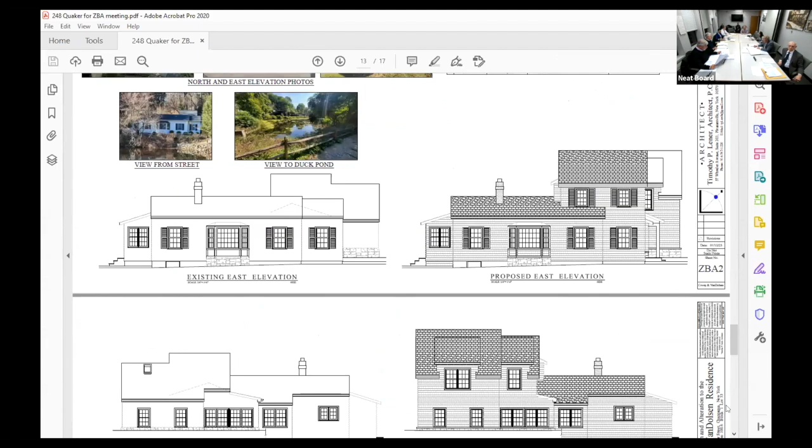Most of this house already sits within the front yard setback. It's obviously a kind of a flag lot off of Quaker. It's a long driveway on the right-hand side of the property.

So right there, you can see all the way on the left-hand side is the existing second floor, which mostly is sloped ceilings. There's a bathroom there, but it's extremely difficult to use. We're looking to gain space on that floor because there is no basement in this house.

The backyard consists of a septic system and the front yard consists of a pond and there's a driveway. So we're squeezed for space. We have a growing family here. So what we did is we raised up the portion of the second floor that's already there to full height. We also added over on the left-hand side of the house a bedroom.

So when you see the site plan, it's the pink area that we're asking the variance for. There's also a little roof for a front porch. There's currently no covering at the front door. So the area that's in yellow on there, if you can see it, that's the front porch we also need a variance for.

There'll be no expansion of the footprint of the house itself other than the front porch roof, which is a minimal impact on anything. So we're only asking to go up from where we are.

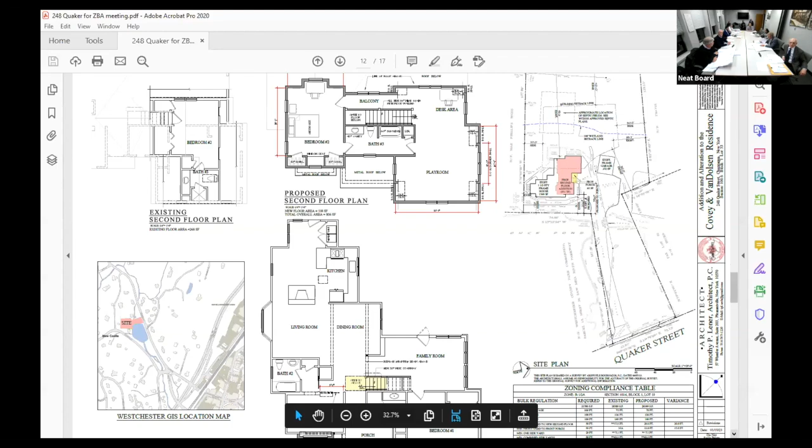We actually did keep, if you want to scroll down to the front elevation, Jackie. The ARB liked this elevation. This is basically the front of the house, even though it doesn't face Quaker over on the right-hand side.

We dropped knee walls down to keep the roof line as low as we could and still keep some nice architectural character. You see the little metal roof that we have that's consisting of front porch, and it's just a single open column that's going to hold that up. That's what we need, what we're asking for.

What space is there currently on the second floor? Well, you could call it a room. It's just an open room right now, and a bathroom, but the ceilings literally are sloping everywhere. I think that addition was put on in the 80s.

I think we had the old plans. It was from the 80s, and I don't know why on earth they built something brand new so low, but they did. There's almost no windows in it. It's not a great space to try and live in.

To reiterate, you're not changing the footprint? Not changing the footprint. And that porch exists there now? Well, there's like a stoop there for it now, but the roof does not exist, and that's the part we're adding. That's the part that actually kicked us to go to ARB for the minimal amount that it is, but they didn't have any issues with it.

Okay. And it'll protect the front door. That's the main way into the house from the driveway. So it'll be, rain and snow, they'll be covered.

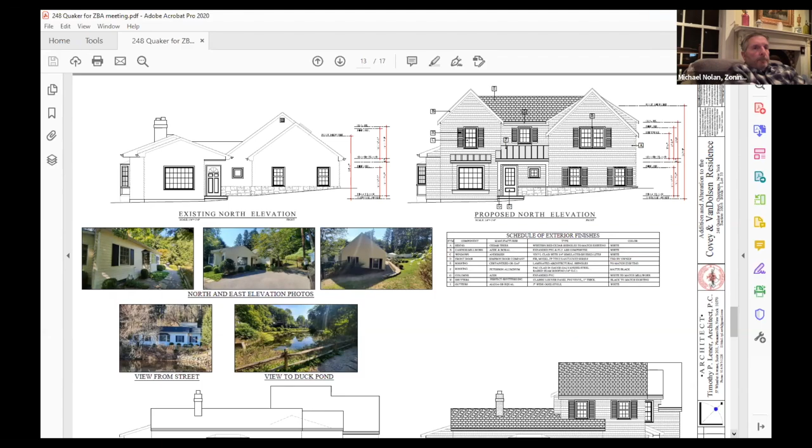I'll make a motion. I move that the Covey VanDolsen application for a front yard variance of 17 feet and a front yard variance of 30 feet, the first for a porch, the second for a portico for the second floor addition, be approved for the following reasons.

There will be no expansion of the footprint of the house. There are severe limitations on doing any work at the house because of pond, septic, and a driveway. This is a pre-existing non-conforming site. The applicant has already gotten ARB approval.

Certainly the expansion will allow for greater use of the building. There will be no undesirable change in character of the neighborhood.

Benefit cannot be sought through other means. The requested variances are, in some cases, substantial, but understandably, given what I've said previously, there'll be no adverse impact on the physical environment. The alleged difficulty was not self-created.

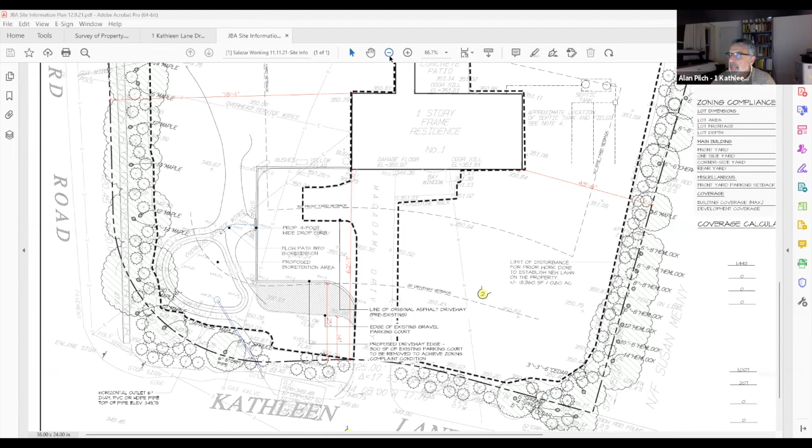Okay, very good. So this property, located at 1 Kathleen Lane, at the intersection of Bedford Road and Kathleen Lane. Historically, there was an existing paved driveway which accessed the house, in the center portion of the lot. There was a gravel parking area located here, which was too close to the front lot line, so that's a violation.

So what we had done was develop a plan to relocate the edge of the pavement to 25 feet as required in the zone, because the front yard setback is 50 feet, so the parking area is required to be 25 feet from the front lot line. That's what was shown on the plan.

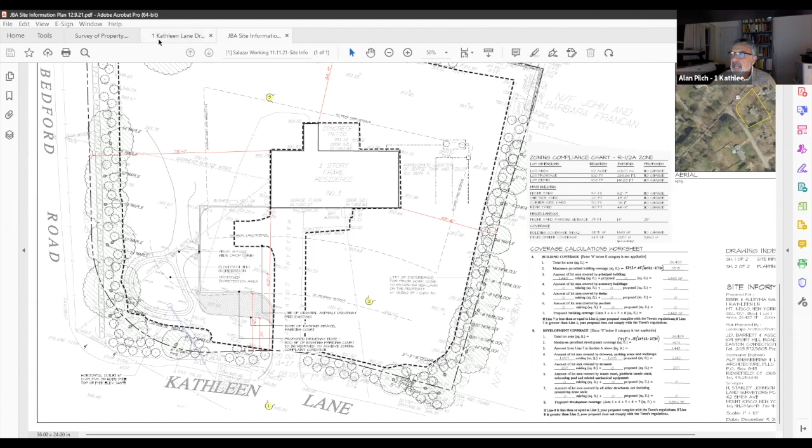And I'll say, unfortunately, that's not what happened. In order to construct this parking area and modify this area in the front lot, the corner of the pavement ended up 22.9 feet away from the front lot line. That is why we are requesting that the board grant a variance of 2.1 feet for the parking area.

Alan, we're not seeing that. You're not at all? We were seeing the survey. Now we can, now we can. Okay, I tried to show a picture. Did this not show up? No, no photos. He might be on a bit of a delay. Well, I'll just say, at any rate, I don't know quite why it isn't.

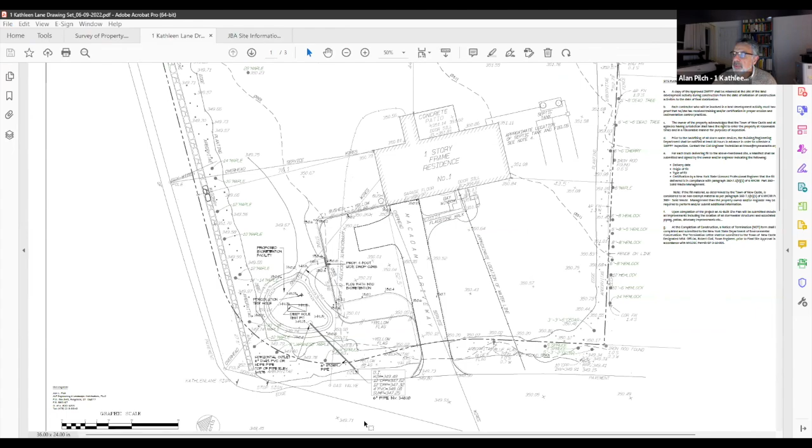That being said, there is a line. Let me just go away from this plan. There is a line of vegetation along the perimeter here, which effectively with a stone wall along Bedford Road, and a line of vegetation along the street, effectively screens the constructed parking area from the street. And at the last meeting, we were requested to submit cost estimates for the work to be performed.

This would be the work to be performed, which would involve cutting the pavement, removing a portion of the stone curb, resetting the curbing, doing any patching that's necessary, and adjusting the sprinkler heads, which are here.

And the estimates, which we submitted this week, were $5,950 to do the adjustments to the curbing and the pavement, and $1,175 for adjusting the sprinkler heads in this area of the property, for a total of $7,125.

So I just want to make that clear, that's one of the reasons we're kindly asking that you grant the variance of 2.1 feet for the parking area due to its proximity to the front lot line. I say it's really quite invisible from the street and also from Bedford Road. My own feeling is it really doesn't harm the community, but I'll let you discuss it here.

Could you repeat for us the circumstances, as you understand it, which resulted in this miscalculation?

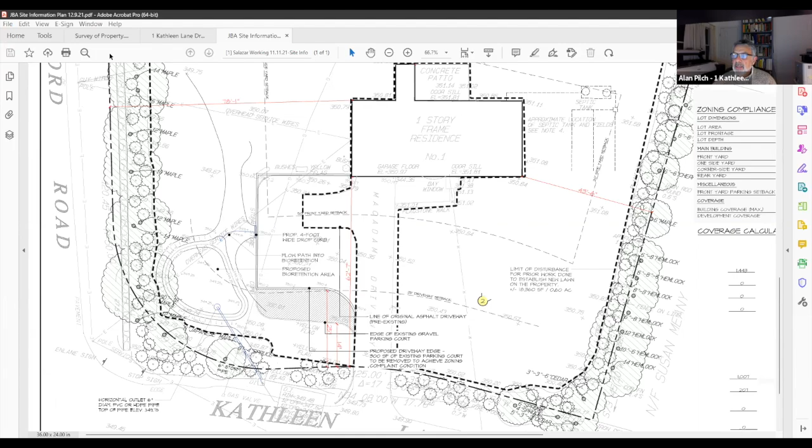So Mr. Salazar engaged a contractor to do this work. Unfortunately, when we had the as-built survey, we found that this parking area was not 25 feet from the front lot line. Instead, it was constructed at 22.9 feet from the front lot line, instead of 25 feet. And so we are requesting the board, if they would kindly grant this variance to permit it to remain here at 22.9 feet from the front lot line, knowing that it was supposed to have been constructed at 25 feet.

Was the contractor given instructions to use an existing survey to calculate the proper location? Or how was he instructed as to where the setback line should be observed? Well, I know that the contractor had the plans in order to do it. I'm really not sure exactly how the contractor calculated the setback from the front lot line in order to make this error and end up being 2.1 feet too close to the front lot line.

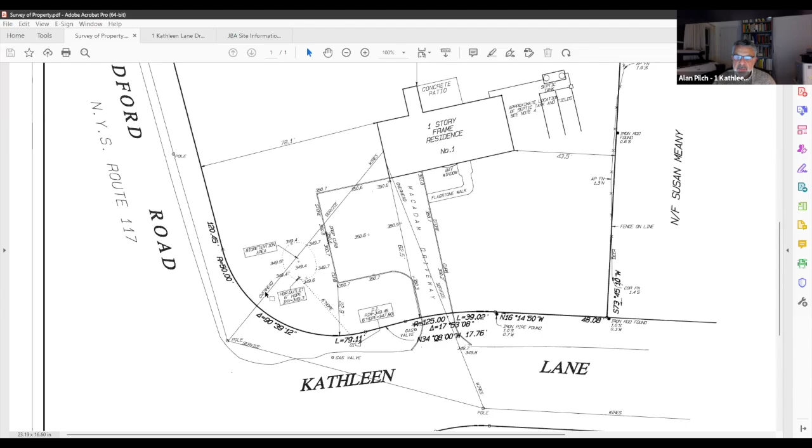When you look at it, it's very subtle, obviously - 2.1 feet towards the street, when there's vegetation along the entire perimeter. I don't understand exactly how that happened either, but unfortunately, that's how the contractor constructed it. I think he maybe measured wrong for some reason.

What vehicles will be parked in the parking area? The reason I have the long curb is because I have a GMC 2500. To make the turn, sometimes I have to go back and forth. I also have a Tahoe for my family, and an Acura - 3 cars. But the most difficult to maneuver is my GMC, a 2500 Denali - that's a big truck. So sometimes I have to go back and forth because I like to come up straight from the street. If I come up backwards and go too fast, I don't want to have a problem. But that's another thing that will help me.

The house has a one-car garage, and so typically when I've been there, there've just been regular passenger vehicles - one or two parked there.

Carrie, is there anyone to be heard on this matter? There are no hands raised. Okay, thank you.

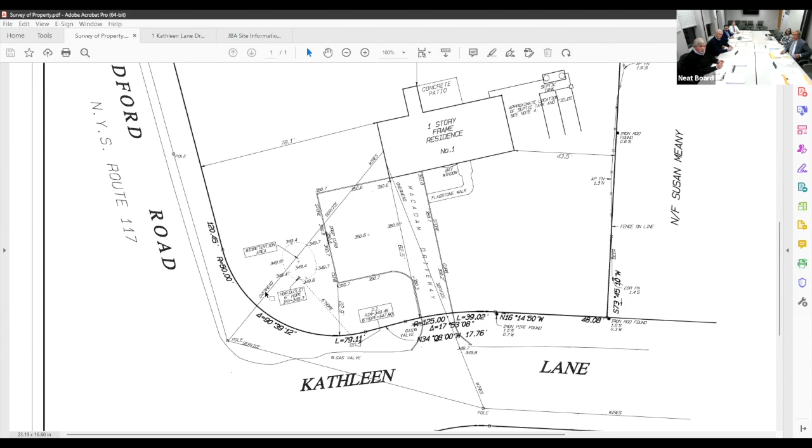Any other questions by the board? Michael, you're okay? All good. I can unshare if you like.

You're inclined to vote, yeah, okay. I make a motion to close the public hearing. I'll second. Chairman Ken Cooper, aye. Howard Dubs, aye. Mike Nolan, aye. Ron Genzeg, aye.

I'll make a motion to approve the request. The request is for a variance of 2.1 feet. Tom, you're confident that that's the right number? We have a survey, yes. Okay, sir, yeah.

The applicant has pointed out that there is a wall on Bedford Road, and there is adequate vegetation on Kathleen, both of which serve to screen the parking area. The applicant has tried to bring the parking area into compliance. He has failed in the sense that he does require this variance. He has come forward and demonstrated that to correct the miscalculation would cost on the order of $7,100. We have no neighbors speaking in opposition to the application.

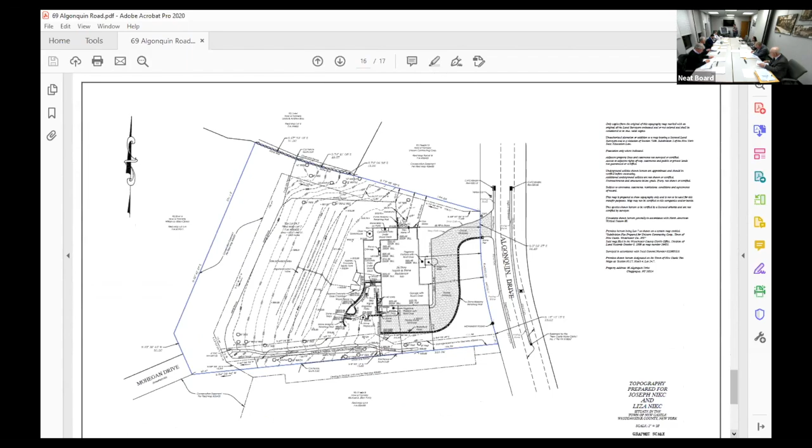As we started to unfold the layers of complexity of trying to get a pool approved, we recognized that as the house sits now, we are over on coverage by about 325 square feet of development coverage. We are adding a modest pool associated with an existing terrace in the rear yard of about 815 square feet, which puts us over 1,100 square feet on the development coverage.

On the overall site plan here, aerial map, there's an existing terrace, and the pool will be associated on this part of the property adjacent to it. This shows what happened on the property prior to my client owning it. As you can see, this circuitous S driveway was much narrower here, and there wasn't really anywhere to park. The distance between the retaining wall and the garage is only 29 feet.

So if you had guests coming in, you'd constantly have to do like a 5-point turn to get out of here. Understanding that, more than likely they've widened this driveway. I've been there numerous times. What I usually do is park and back out and leave instead of trying to turn around.

So I think that was part of the development coverage that expanded, and I know that for a fact because I looked at some of the old plans. This was under the previous owner, trying to give you a little bit of the history and why.

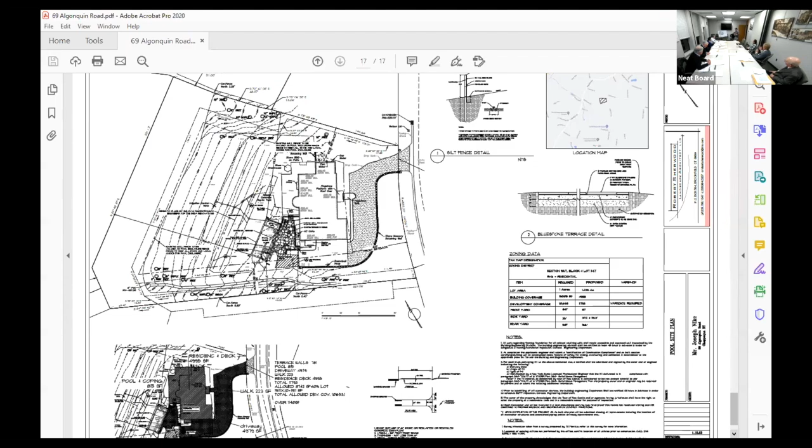In looking at adding this 800 square feet for the pool, did you look at the rest of the property in totality to see if there was something else that could be done to either mitigate that 800 or detract or delete from the overage? We have, and I discussed it with the homeowner.

What's the best plan to kind of mark up? As we come around this, the garage doors end here, and they built a pad over here in paver, so you can clearly tell it wasn't original. This space is all Unilock pavers, while the rest of the driveway is a nice, beautiful pea gravel. So that area, to me, would be an easy deletion, and that would be about 310 square feet that we could remove pretty easily.

And then the other option would be an easy option. There's that same paver walkway that comes up to the front door. We could eliminate this walk since there's no real reason to walk around. People can park in the front and just walk through the pea gravel, and that would add about another 150 square feet of removal, getting me to 457 or 460 square feet.

Grass surface, that would be? Yeah, we return it back to landscape and grass.

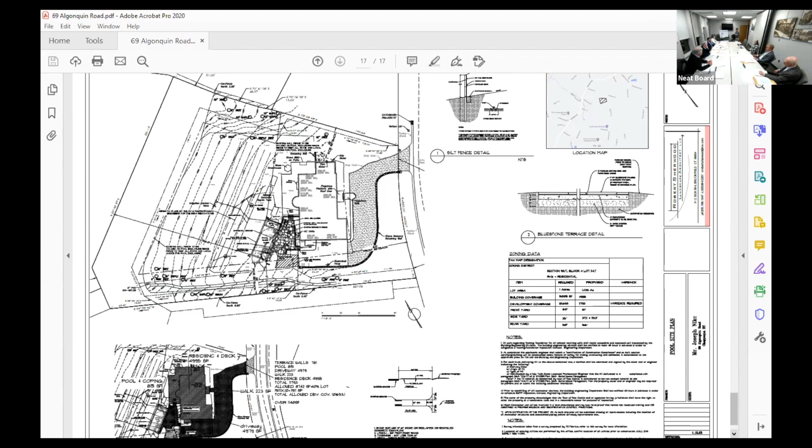Is Michael still on? Oh yes, okay, no that's okay. Any other questions by the board? No, I'm just trying to get the numbers right. Sure.

You're proposing 11,793, and with your reductions it brings it down to 683, is that what you're saying? No, the 1140 is reduced, now it's reduced to 683. The pavers are 307, 310 square feet, and then 150 square feet, so I'm removing 457 square feet off of that.

And what is your maximum development that you have listed? 10,653. That is the maximum allowed in the district, 10,653. What is your proposed maximum development? 11,336.

But if you take off what you propose to eliminate, that brings it way down. The way you proposed it originally is 11,030... what was it now, 11,793? And you're gonna take off 450? No, we're taking 457 off. Okay, and what does that come to? My brain is not working right now, I'm checking my math real quick. 1130, 457 we take... 11,336, all right I was right. Thank you, you guys all had me nervous there for a minute. I'm pretty sure I ran those numbers right. So we're looking to have 11,336 square feet developed, where 10,653 is allowed. Yes sir, all right, now we got it.

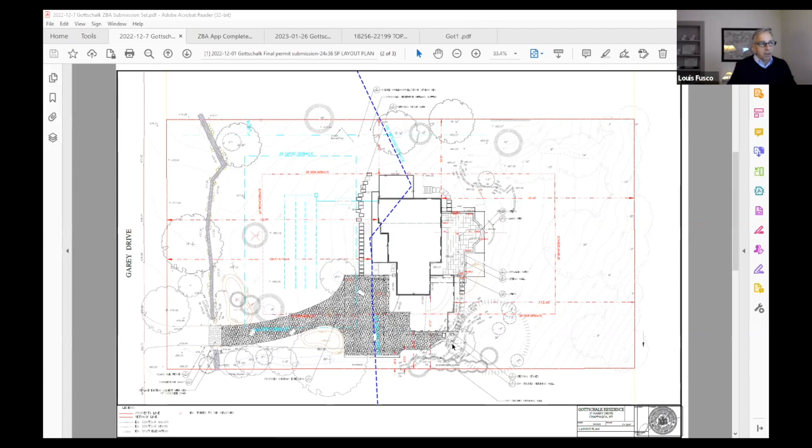We've looked at some other alternatives, but unfortunately, because of the septic, the setbacks, and existing trees, the front of the property slopes down to the brook, and the rear slopes pretty aggressively in this area. These are existing retaining walls that are saving some pretty impressive existing trees that I can show you in some photos, in the back in this corner here. So there was limitation on how much we could extend into the backyard, which would cause parking and entering and exiting into this area, damaging additional roots to trees.

We're proposing a full planting plan, adding 11 pretty mature evergreens, native arborvitae, and Juniperus virginiana, in addition to the existing evergreen screening that is in this location. The house is set pretty far back from Garey Drive to begin with. We're also taking away a lot of invasive species in the wetland buffer areas here and replanting this with natives as well.

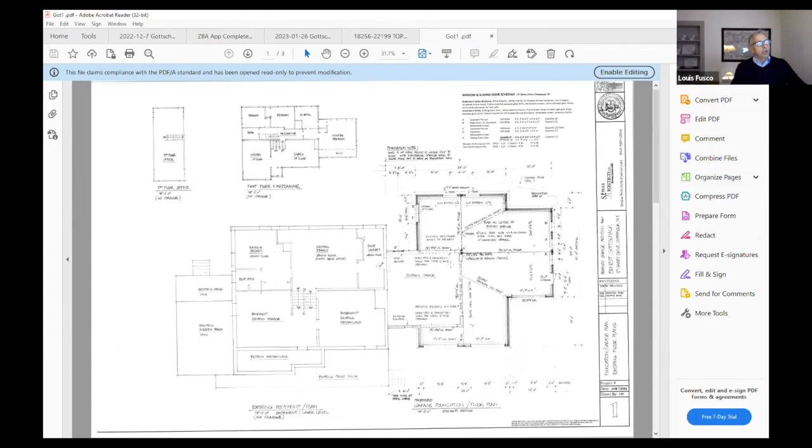Just to give you some idea of the architecture of this, the plan here is the garage with entrances in here and here, storage and work area. This is the existing garage. The existing house is here. The new addition is all a 1-story addition set back into this area here. These are close-up front, side, and rear views of the house.

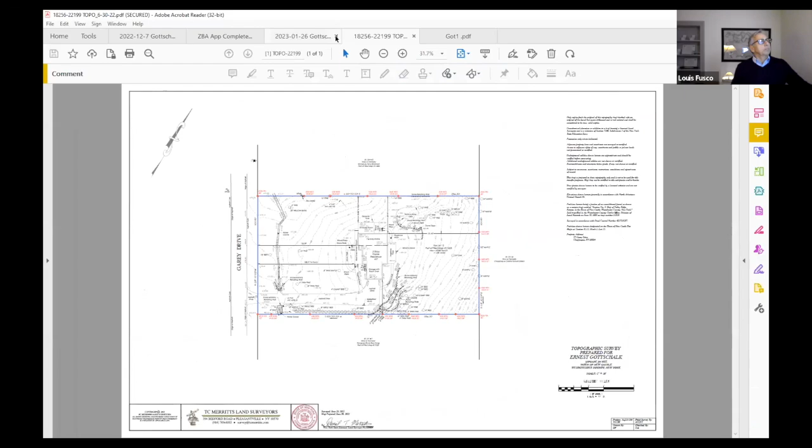And we have some photos. This is from the street, actually. It's pretty hidden by plantings. The one closest neighbor—I think I have another photo that might show it a little bit better.

And you see this photo now of the closest neighbor in the area back in here. You can see their garages, so it's the garage side of the house. This is that hilled area. Pretty impressive—no, we're not seeing that. We still have the screen, the ABCD screen, up.

Give me one sec. Can you see it now? Yes, okay. So these are the existing retaining walls and the slope of the rear. Very impressive—one of the largest dawn redwoods that I've seen lately in the back, which we're trying to work around and save. And the existing screening buffer falls between the closest neighbor, and it's the garage side of their house that is facing the new addition, which is just off the photo here.

Let's go back. So these other photos show—yeah, you could sort of see that garage there. The new garage sort of pops in back in this area here and onto the driveway. These are shots of the rear of the property and the existing garage in this location.

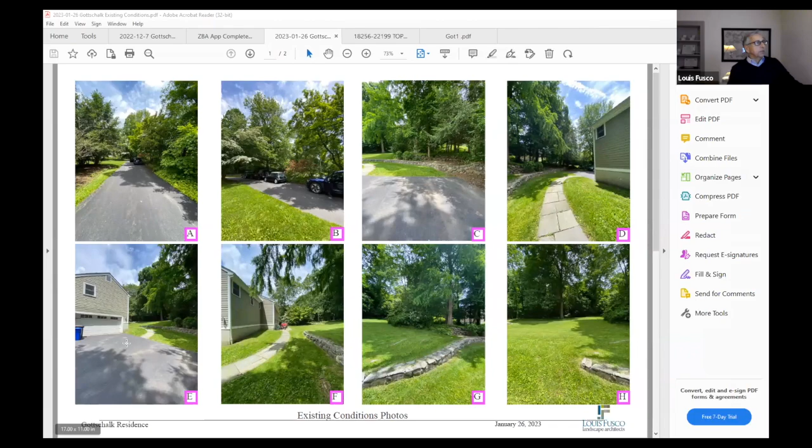So we feel that the request is modest in size. It's a 12-foot setback, and the impact to the environment and to the neighborhood is minor in this case. We're screening whatever view can be seen from either the road or the neighbor. While we do feel it is self-created, like most variances, we feel it is not causing any adverse problems to the neighborhood—it's in character with the neighborhood. The house was complimented in the presentation to the ARB with regard to the quality of the architecture fitting in. It's not out of scale for the neighborhood. For these reasons, and for the restrictions on the site with the septic and the wetlands, we're asking for this variance, and we're here to answer any questions.

No, it's pretty straightforward to me. Carrie, is anyone here to be heard on this matter? No one's been attending.

Michael, Howard, Ron, any comments? I would just say I think the horticultural work they're doing on the property, taking out the invasive species, et cetera, is admirable. Thank you.

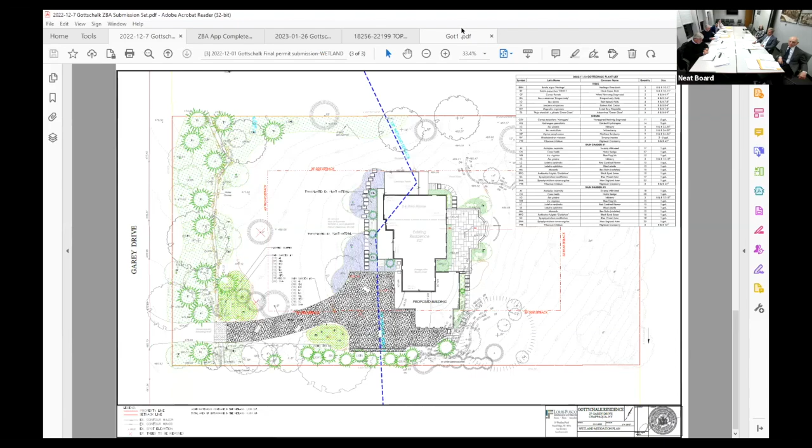Aye. I'll make a motion. I move that the Gottschalk application for a 12-foot side yard variance for the expansion of a garage and the addition of storage and a workshop be approved for the following reasons. The applicant has appeared before the ARB and received approval, has developed an extensive landscaping plan to improve the screening of the property. There will be no undesirable change in the character of the neighborhood. The benefit cannot be sought through other means, particularly due to the septic system. The requested variance is not substantial. There will be no adverse impact on the physical environment, though the alleged difficulty is self-created.

You will have 6 months to start, 1 year to complete. We'll need a foundation survey prior to framing. There were no neighbors that spoke in opposition to this application.